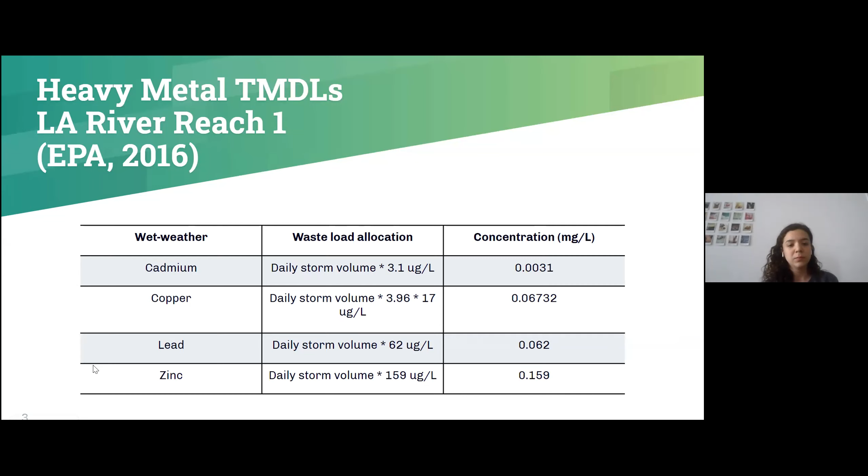So the part of the LA River which is adjacent to our area of interest is right at the end of the LA River. And so in the 2016 EPA impaired water reports, they found very high concentrations of heavy metals, particularly cadmium, copper, lead, and zinc, a lot of which came from this industrial area we're looking at directly adjacent to it.

And so when we were designing our systems and doing our calculations, we assumed that the concentration of these heavy metals in the stormwater runoff from our area was the same as the impaired waters concentrations that were reported by the EPA, which can be seen in the table. Next slide.

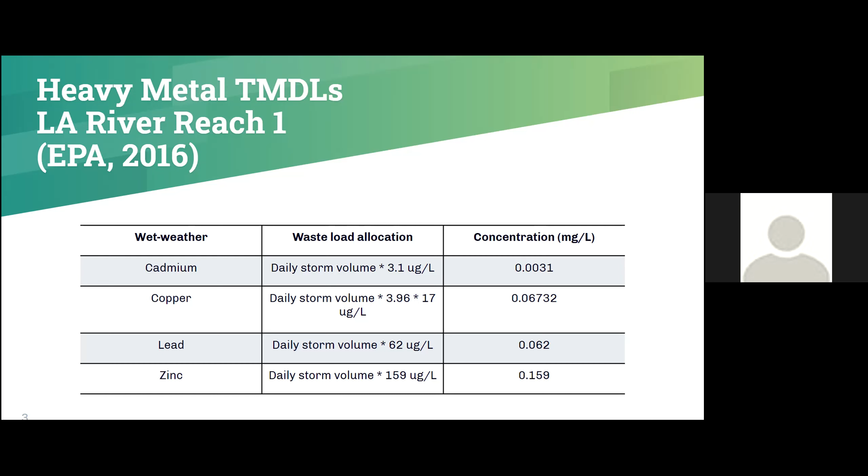And so of the two solutions that we looked at designing for our area, the first one was a permeable pavement with a sodium titanate substructure inside of it. That removes heavy metals from stormwater very well through ion exchange. So these heavy metals will replace the sodium in the sodium titanate and will be absorbed into it.

And then the other solution we were looking at was a more typical stormwater biofiltration system, which would remove heavy metals from the stormwater by absorbing into the soil, as well as some minor plant uptake.

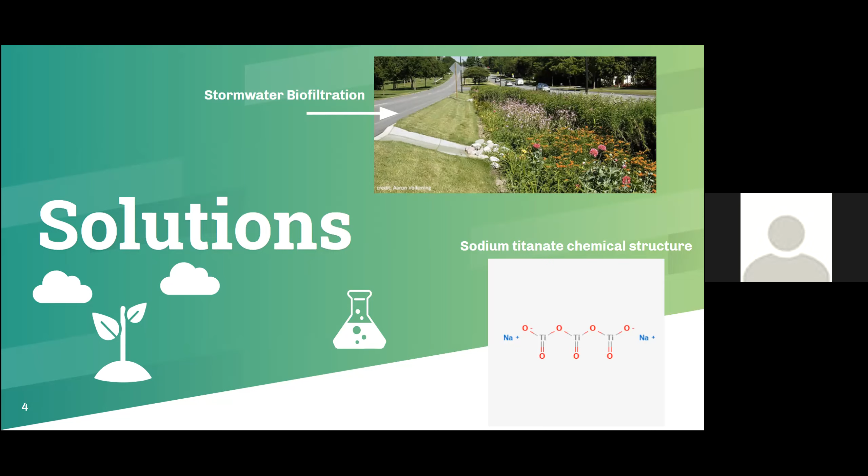So as Andrew had mentioned, the first solution that we had investigated was a permeable pavement system that would consist of sodium titanate infused within its mixture. After investigating a couple different types of permeable pavement, we decided to choose porous concrete for its ability to handle low impact traffic within this area.

And it has an approximate infiltration rate, accounting for potential debris that would be running over this area, of 16 centimeters per hour. Using linear measurements of the area of focus, we determined that there was around 0.26 square kilometers of pavement that would be retrofitted with this solution.

And using a conservation of mass function in the graph up in the right corner, with varying precipitation flows coming in throughout a year, we determined that these heavy metals would ultimately have a removal capacity of 75 to 95% within this system. And these were estimated with the reaction rate coefficients found in a paper that was doing a similar study on copper, zinc, and lead.

Looking at the graph to the left, this is a linear regression of the depletion of sodium titanate through this ion exchange, if we were to implement the system over a 40-year period, accounting for a factor of safety of about 2.

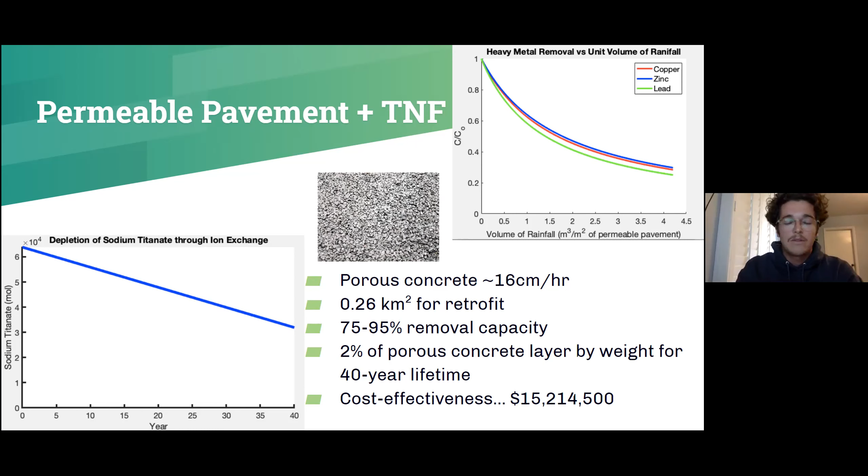Unfortunately, as can be seen with the very large number at the bottom, implementing such a system, or even just the cost of materials for a porous concrete and sodium titanate slurry, would cost upwards of $15 million. This is very expensive, we understand, but we'll be talking about this cost effectiveness a little bit later. Next slide.

And so for our biofilter system, we found that our area of interest has a very high percentage of impervious surfaces right now. And so we found from literature review that oftentimes for areas like these, we want the size of the biofilter to be about 2.5% of the total catchment area.

And so for our catchment area of 1.38 square kilometers, that comes out to over 30,000 square meters of biofilter, which we can't implement as a single large biofilter. And so we found that it was much more effective to spread out a bunch of smaller biofilters.

And so when we were analyzing it, we assumed an approximate area of 250 square meters per filter area. And the locations of these biofilters we want to put next to highly frequented roads like West Anaheim Street and Santa Fe Avenue, as well as directly next to the LA River, which has lots of open space.

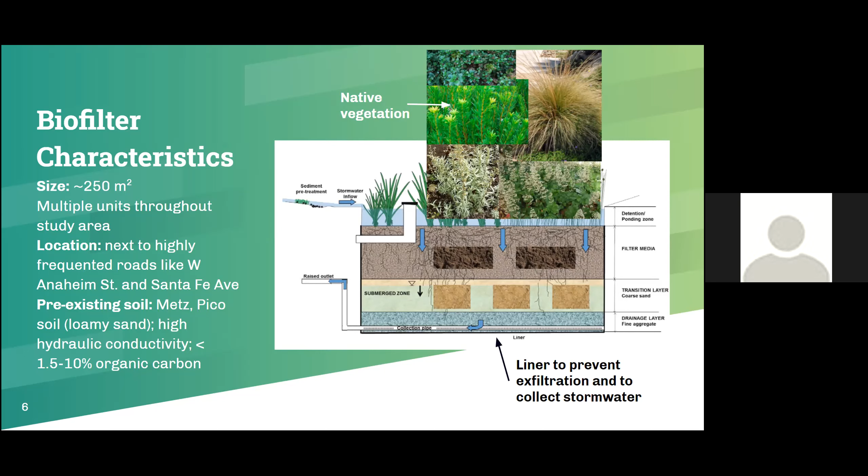And then for the vegetation area, we consulted the Southern California LID manual for native plants that are effective in bioretention and biofilter systems. And we found that plants such as Pacific wax myrtle and mugwort and island alum root would be effective in our biofilters, as well as we could utilize some of the soil already in the area, which is categorized as Metz or Pico soil by the National Soil Survey. And it's good because it has very high hydraulic conductivity, but it doesn't always have high enough organic carbon content for our uses.

So because LA is a pretty water scarce area, we really wanted to implement this biofilter to be able to collect the stormwater for reuse rather than allowing it to exfiltrate into the surrounding soil. So we'll be implementing a liner as well as a raised outlet, and then using collection pipes in the drainage layer to direct the water into the existing stormwater system in the Long Beach area.

And then other than that, the layers of our biofilter are pretty typical of any other biofilter. We'll have a pre-treatment zone with rocks, vegetation, and grates to prevent larger sediments from entering the system. We'll have all that native vegetation that Andrew just talked about in the ponding zone, as well as about 50 millimeters of organic mulch, which will help bring up that organic carbon content that we're lacking in the existing soil already. And then we'll have the filter media, which does the majority of the actual removal of heavy metals, especially.

From a literature review, we found a filter media consisting of about 80% amended sandy loam, which is present in the existing soil there already, like Andrew just mentioned. So we can use some of that, as well as 10% vermiculite and 10% perlite by volume.

And then we'll have a transition layer to prevent things from making it down into the drainage layer of the system and prevent the mixing of pollutants in there. And that'll just be a layer of coarse sand to prevent it from going into the drainage layer, which will then be collected through the collection pipe, stopped by the liner from exfiltrating, and go into the existing stormwater system. Next slide.

And then in terms of the cost analysis, like Sterling mentioned, the porous concrete system is pretty expensive to implement in this already very industrial, very developed area. And so for that reason, the many biofilters would be a lot more feasible to implement in this very much developed area. So we can put those smaller biofilters alongside the LA River and alongside those large impervious pavements, those big roads, and place these biofilters in places that stormwater naturally flows in the area.

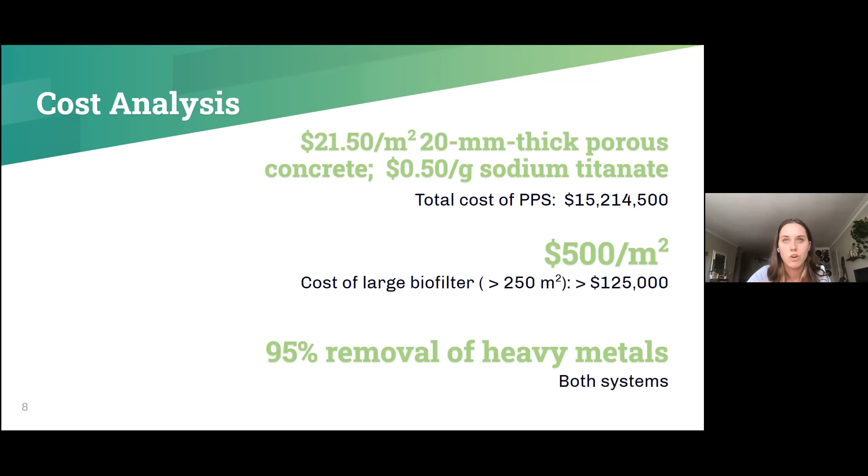The cost of a large biofilter is estimated to be about $500 per meter squared, which comes out to about $125,000 for a single biofilter. Both of the systems we analyzed are extremely effective at removing heavy metals. They both have some downsides in terms of other pollutants; nutrients like phosphorus and nitrogen can be a bit of a problem in biofilters. And so that's something we looked at improving the removal of in biofilters, but overall both were extremely effective in our primary goal, which was removing heavy metals.

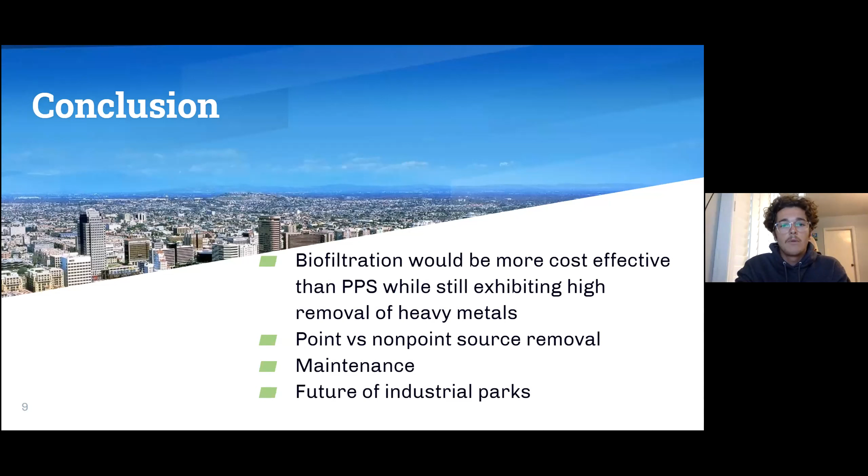So to summarize our main finding that Natasha had just gone over, clearly biofiltration would be the most cost effective in achieving our goal of high removals of heavy metals. Some of our biggest observations about this project as a whole: the first one is point versus non-point source removal.

With this permeable pavement system, the goal was to try and tackle this heavy metal removal at the source of where it's coming from, whether that's the traffic from the scrap metal yards that are in this area, the auto industry, any other traffic flow, things coming from cars traveling in this area, trying to find ways to, during the wet periods in Long Beach, remove those heavy metals before this water enters the LA River or moves through the stormwater systems. While bioretention systems focus more on collecting that water from a certain area and achieving mass removal at the same time.

So if we were to think about scaling this beyond an area of 1.5 square kilometers, at such high cost for a permeable pavement system for a small area, it would be much more economically feasible to focus more on sourcing all of our water to the same area for any sort of water treatment.

The second thing that we didn't really get a chance to talk about or investigate in our study was the maintenance of such systems. With both adsorption and with ion exchange, the fact of the matter is that these heavy metals will still be present within these filtration systems. So the question becomes, once we collect these heavy metals, what do we need to do to either pull these filter medias out and extract these heavy metals, or can we somehow control the flow that's moving through these systems to collect these heavy metals and dispose of them properly?

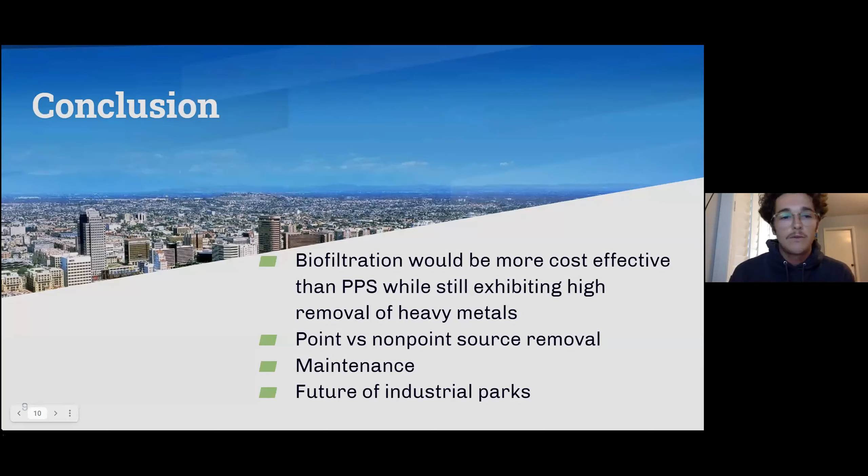And that's our presentation. So if there are any questions, feel free to ask them, but thank you for listening.

Perfect. Any question from students? You guys can write the question in the chat window, or if nothing else, you can clap using the symbol like I just did, because they spent a lot of time, like you guys, working on this project.

Particularly, this one was a very adventurous project because they use materials that are normally not used for stormwater treatment. So I knew from day one that it's going to be expensive. But it's important for them to find an alternative way where it isn't expensive. So like you conclude, if you just spread those materials throughout the entire place, it's going to be expensive. But if you collect all that water and let it pass through a filter which has these materials that you replace from time to time, it's going to be much cheaper. So I think that's the important conclusion.

So that means stormwater routing is a major part of this design here. And then you can perhaps store it in underground tanks and let it filter through that system over time before it's discharged. So it's possible that way. So it's not really a bad thing. But I would suggest you think of this, because we are presenting new materials. So this has nothing to do with this class presentation. Imagine this is your startup, something that you are going to present to LA County.